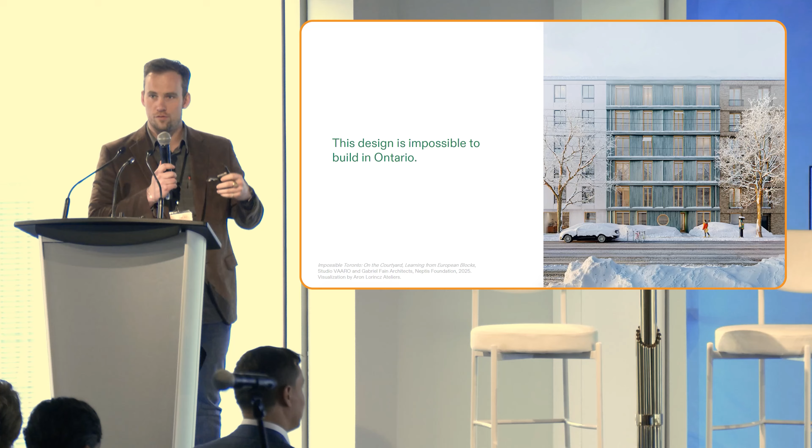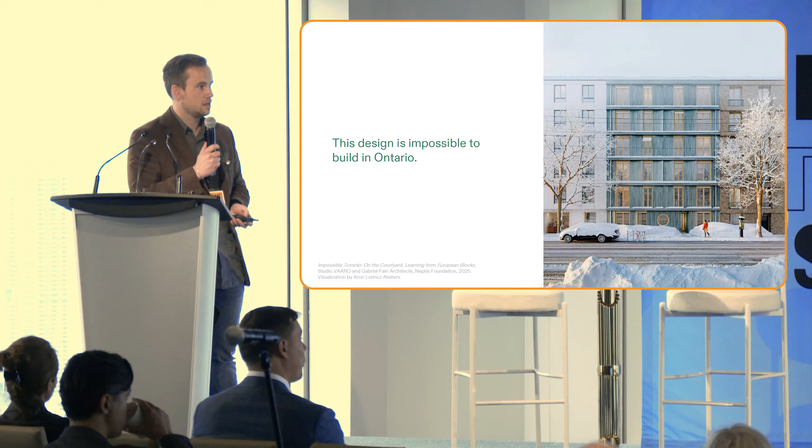As some of you may know from the work on Impossible Zoning and other work the Neptis Foundation has supported, this particular design, a 6-story building, partly because of what's inside its floor plan, is impossible to build in Ontario. We've started to ask why. We also know that over the next 30 years we're going to be building a lot of multiplexes and housing on major streets. As you've seen from some architects before, it's possible to build these, but are they accessible? Do they have sprinklers? If you're asleep in your bedroom and a fire starts in your kitchen, will you die? Is this the type of housing that, given our aging demographic, is being built in the best possible way?

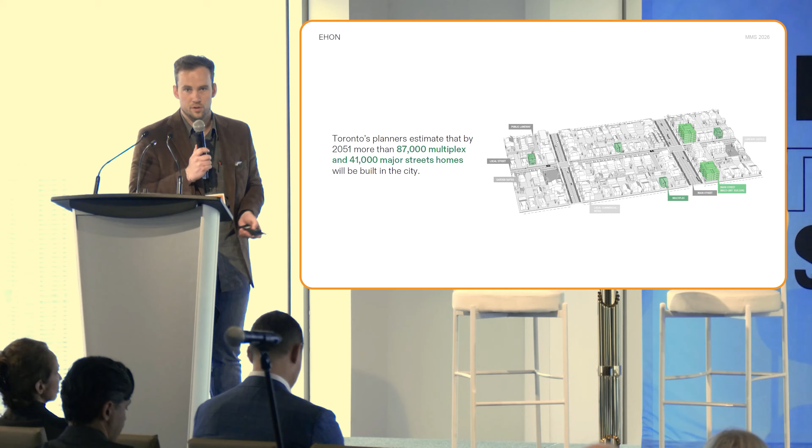The answer to those questions is often no. Partly the culprit is the building code, which has been written to make it easy to build houses, reasonably easy to build high-rises where you have the economies of scale to not really give a shit about additional requirements. But if you're trying to do stuff in between, you're kind of screwed.

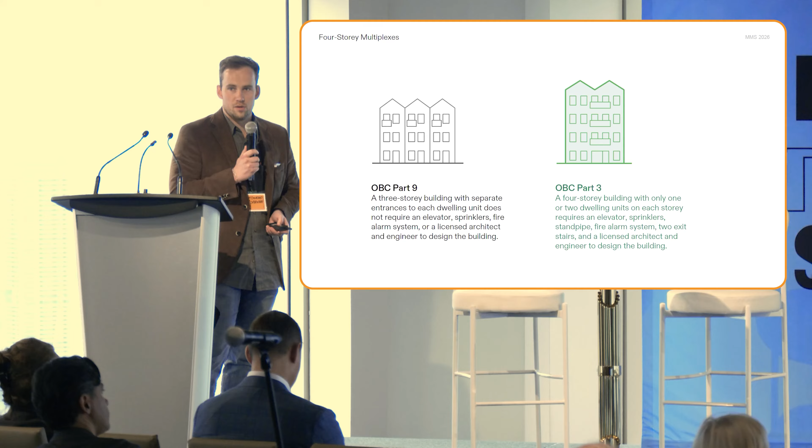So what does that mean? As many of you know, there's this Part 9, Part 3 binary in the code. If you're doing a Part 9 building, you don't need an elevator, you don't need sprinklers, and if you only have 4 units sharing the means of egress, you don't need a fire alarm system. Sounds safe and accessible, doesn't it? As soon as you go to 4 stories, you need an elevator, 2 stairs, sprinklers, fire alarm system, standpipe, licensed architect, licensed engineer. Who wants to go to 4 stories?

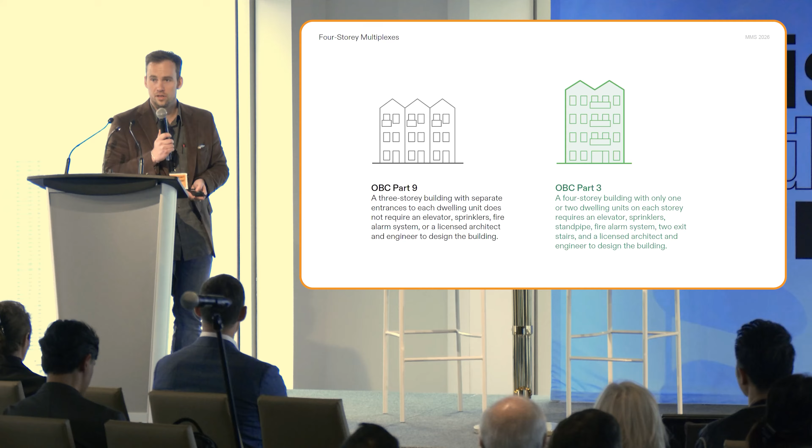But from a public policy perspective, to build safer, more accessible housing, we should actually be doing everything in our power to build 4-story buildings. Zoning and land use policies have now started to shift to say we want 4-story buildings. So the next layer on the onion we need to peel is the building code disincentivizing it.

This is confirmed even in some of the City of Toronto's own reporting. The City of Toronto, as part of the Housing Accelerator Fund, was looking at allowing 6-plexes and went forward with it. But in the same reporting, they looked at allowing 4-story buildings, and the excuse they gave not to go forward with 4-story permissions was the building code, which is kind of backwards — that you wouldn't do a zoning reform because of the building code.

So Jack Keys and I worked on a report that looks at recommendations for buildings up to 18 meters, about 6 stories. We looked at ways trade-offs like modern fire alarm systems and sprinkler systems will increase the safety and affordability of housing supply. We looked at research actually done by the province, Toronto Buildings, Toronto Fire, and Toronto Planning in the 1990s, but only partially implemented. We've known about these problems for more than 30 years, and it's time to bring them back to the forefront.

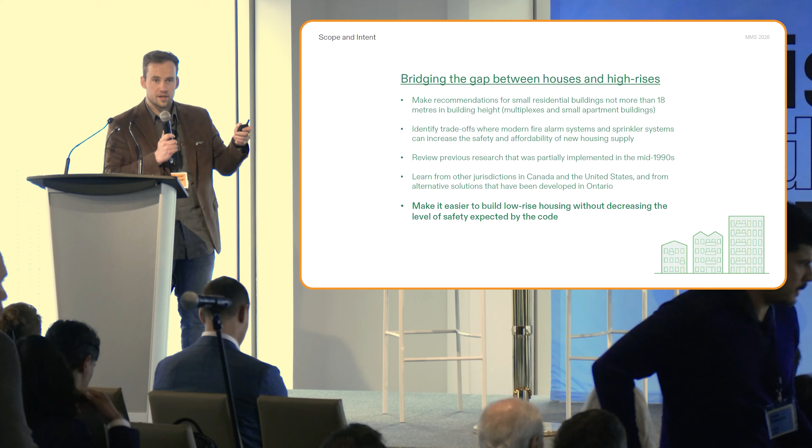We're going to learn from other jurisdictions in Canada, in the US, and also alternative solutions being the performance-based compliance pathway that have been approved in Ontario. What does this mean? It's, again, to make housing easier to build, but without decreasing the level of safety. So anytime a fire chief or someone says the word compromise, I get really pissed off, because that is not what we're doing here.

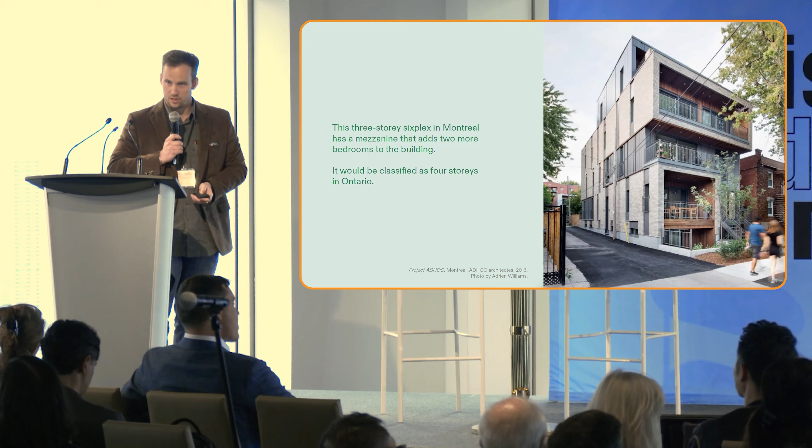So this is a building in Montreal. Now look at it closely. How many stories is this building under building code compliance? In Ontario, this building is 4 stories and has to have elevators, sprinklers, etc. In Montreal, this building is 3 stories. Why is that? In Montreal, being a chartered city with its ability to write codes that contravene provincial law, they allow mezzanines on the uppermost story that are not more than 40% of the area on the level below if a fire alarm system is provided.

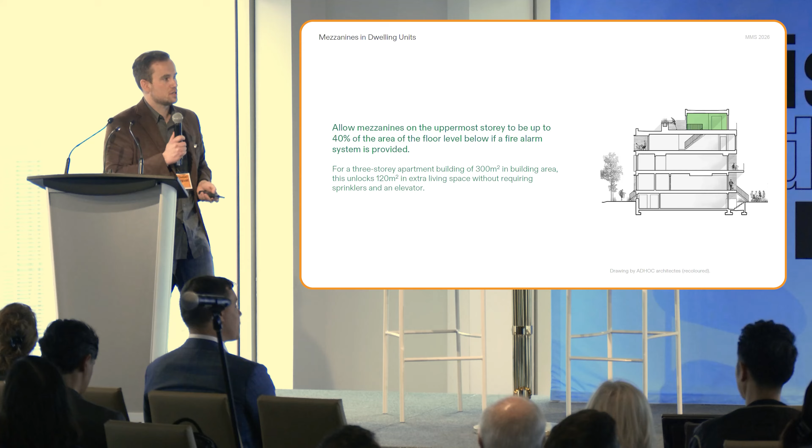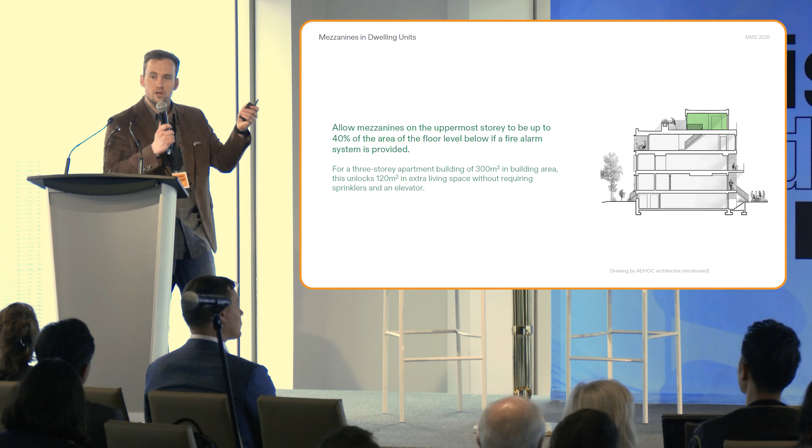That's about 11% more floor space in your building. That's an extremely nice bedroom with a rooftop deck beside it. And if you notice the setback, it also means you're not overshadowing or causing the building to feel like a four-story building. It's kind of awesome.

And for the architects in the room, again, mezzanines are allowed in the code, but they gotta look down to the space below. In Montreal, you can do the thing on the top, which is, frankly, just a far better and safer design. Next topic.

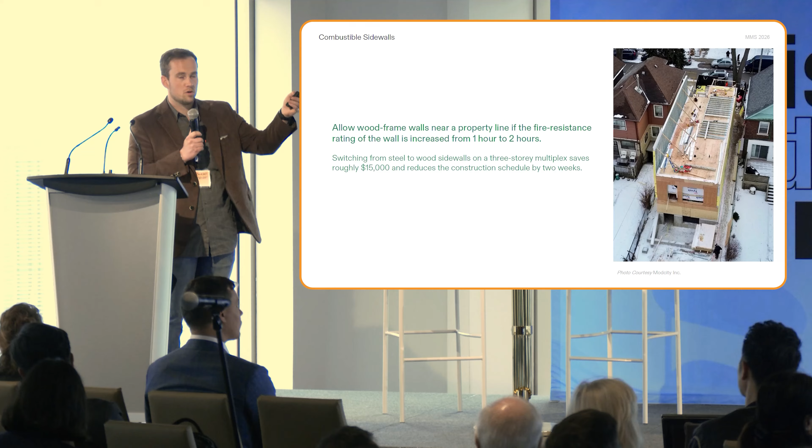But the problem is that when you're doing a small 3-story project, you tend to not have the time and budget to go through the fire protection engineering performance-based approach, and this is why we need to codify this. Because if our goal is to lower the embodied carbon emissions and the cost of construction and allow prefabrication where the entire building is going up in wood, this is the solution.

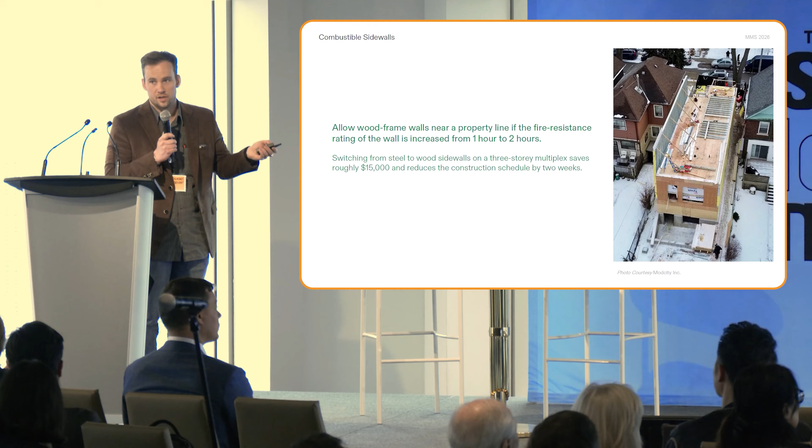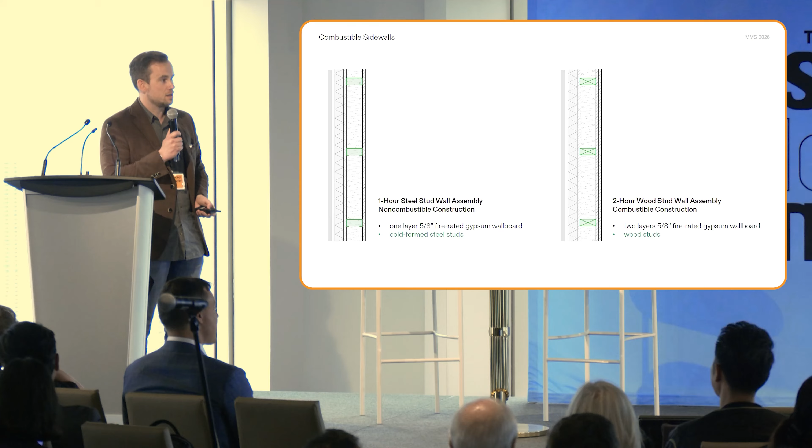Here you're seeing a 3-story multiplex with steel studs on the sidewalls. The steel studs are kind of fucking stupid. Here is, again, your 1-hour steel stud compliant wall. Here is your 2-hour wood wall. We live in Canada. We like our trees. Canadian lumber was in the King's speech when he came to Ottawa. So we should be doing everything in our power to put wood studs everywhere we can, regardless of the growth rings.

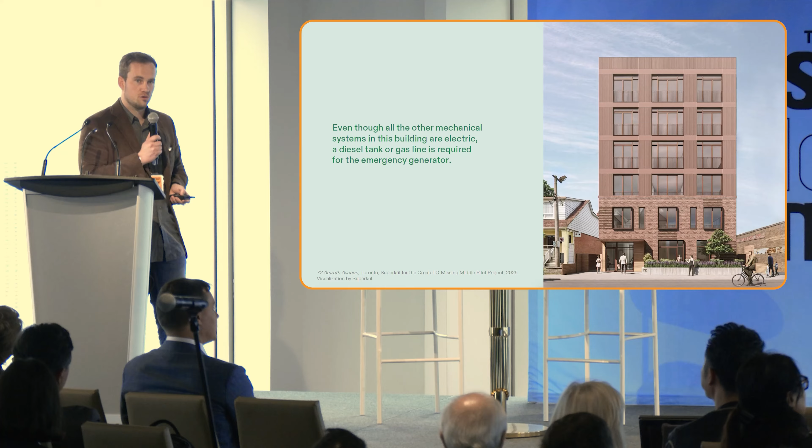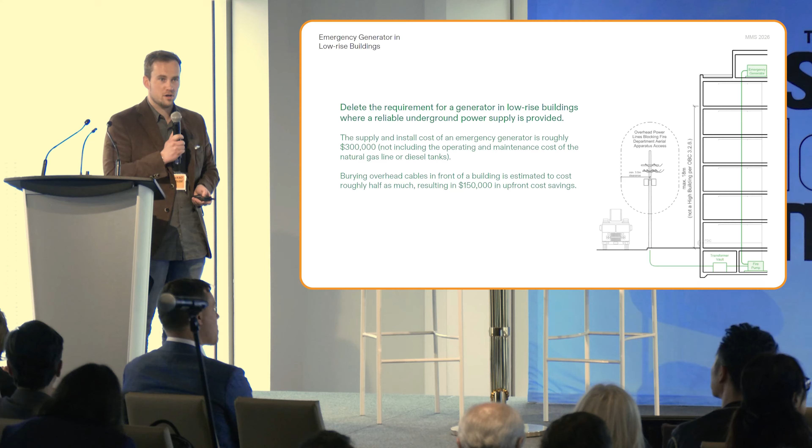Here's the 6-story building. That is not built yet. If the municipal water supply doesn't have enough pressure, you need to put a fire pump for the sprinkler system. If you put a fire pump, you need to have a 2-hour emergency generator. If you have a generator but your building's all electric, you probably need a diesel tank or a gas line. How much does a generator cost and the diesel tank and the operating expenses and everything for it? Somewhere around $250,000 to $300,000. Not a big deal if you're a high-rise building. If you're a 4 to 6-story building, that's a real issue. Plus, you're putting in a natural gas line to a building that should be all electric.

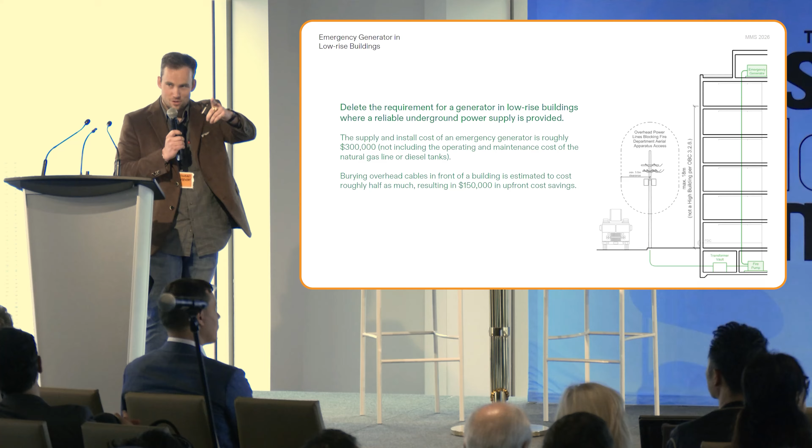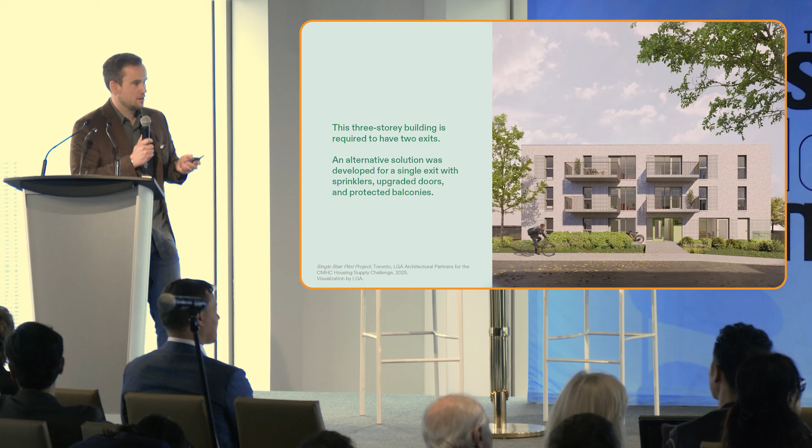I'm going to talk briefly about single stair. This is an alternative solution that we submitted in Toronto. Instead of having 2 exits for the 3-story building, it's sprinklered, with upgraded doors and protected balconies.

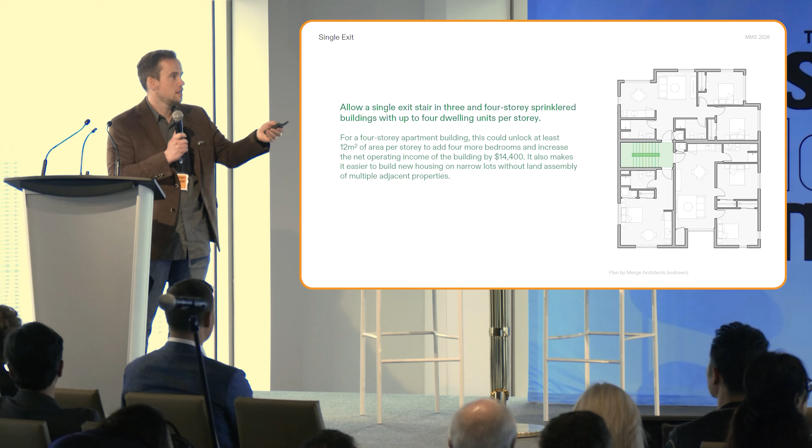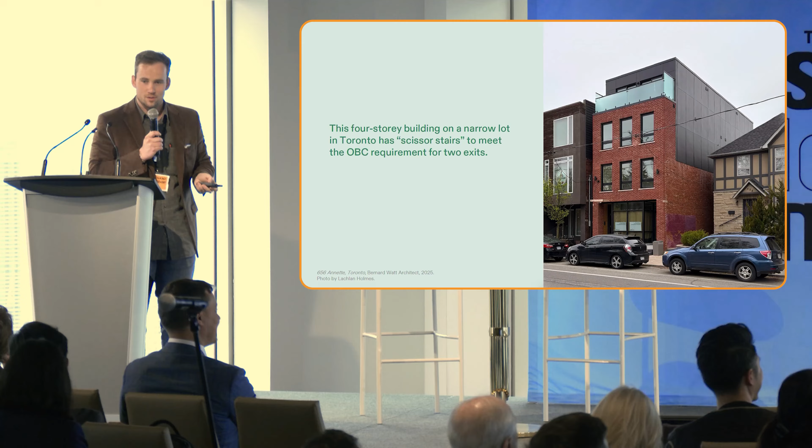This is a 4-story building in Toronto that someone in the room has developed. It's got scissor stairs, and we know that the developer wasn't happy having to do scissor stairs. Why do scissor stairs matter, though?

At the top, you're seeing the typical compliance of a scissor stair—you're using about 46 square meters of space for circulation. At the bottom is the recommended scissor stair design for small buildings, which would be at least a compromise towards single stair to make them more efficient.

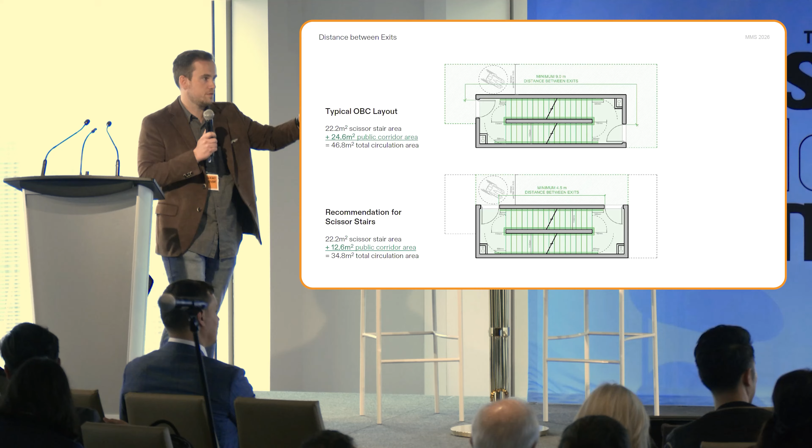But what does single stair really mean? Single stair cuts you down to less than half as much circulation area. It's kind of common sense.

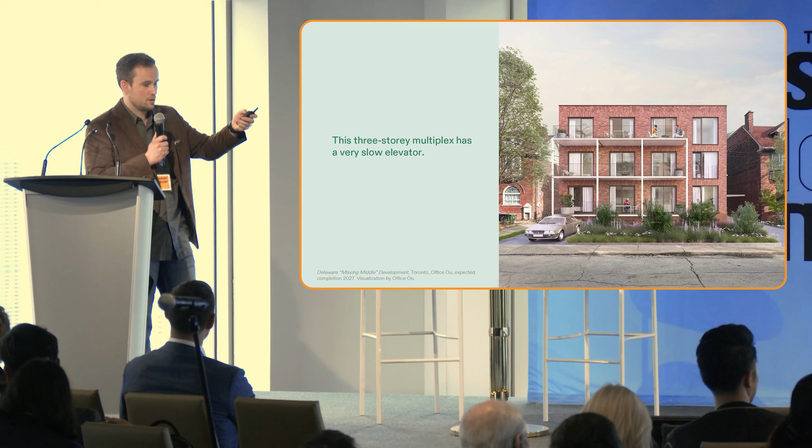The last little topic I'll go into in my last minute here. This is a 3-story plex that we'll be hearing a bit more about. It's got a very slow elevator. Partly that's because you can either put a very slow, cheap elevator in, or an enormous, expensive elevator.

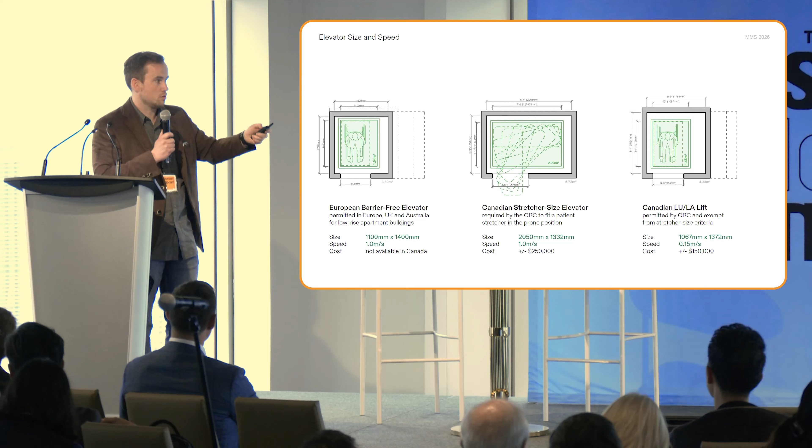The rest of the world outside North America has this other type of elevator that a wheelchair can roll in and out of. Every time I travel around the world and I'm in a 6-story apartment building, I don't see any issues with having that kind of elevator. But North America is, I guess, a regulatory island, and maybe now that Canada's looking to trade more with other jurisdictions, we can de-Americanize our codes and standards.

So what does all of this mean? If you look at everything in the report, it means that multiplexes like this building could have had 2 more bedrooms and an elevator. We also did a quick voodoo math macroeconomic exercise looking at the impact on net operating income and construction cost, and found that the total pro forma impact is somewhere between $500,000 and just over $1 million.

So how do you change the building code? Well, we have the Ontario Building Code, which is the jurisdiction of the Ontario Ministry of Municipal Affairs and Housing. And we have the National Building Code, which we should harmonize more and more to, written by the CBHCC. I sit on the task group for CBHCC on single stair, and we are going to spend up until 2030 working on that.

The work is going smoothly. I'm quite impressed at the process.

But the challenge is that if we submit a code change request tomorrow for the other 7 items in this book to NBC, they won't be put on the task group priority list until the next code cycle, which means the earliest date they'll possibly be in the National Building Code is 2035, and Ontario takes 1.5 years to harmonize afterwards. So the question is, who is going to lead on these code changes, and should we go to the national or provincial process? I leave you all to ponder that question.